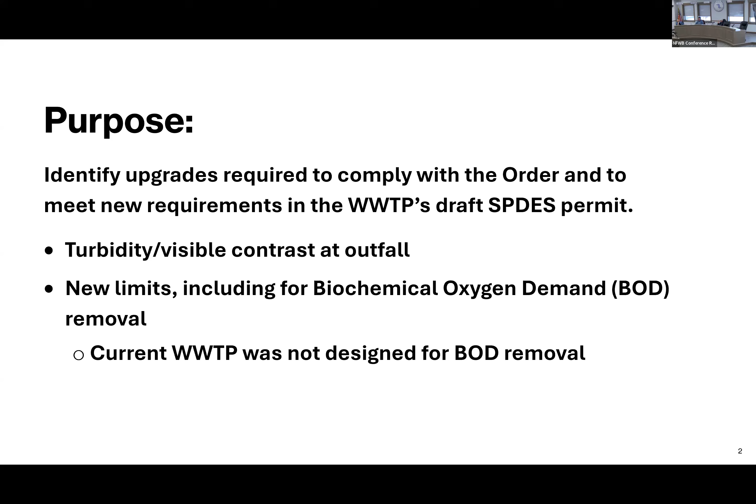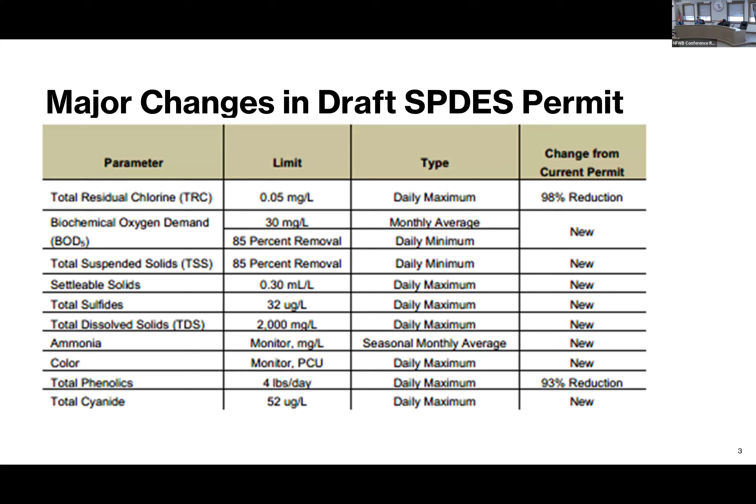In addition, the main focus of the order is on turbidity and visible contrast at our outfall in the lower Niagara River. So in addition to the BOD parameter that I mentioned, there are a number of new parameters in the draft SPDES permit or tighter limits for certain existing parameters. And the goal was to design a plant that could reliably meet the draft permit requirements, as well as future regulatory requirements.

We were looking to minimize capital costs, in part by reusing our existing wastewater treatment facility, to which all of the sewers in the city are already routed. Reusing the facility eliminates substantial costs. We hoped to find a plan that would limit the increase in operation and maintenance costs associated with the new equipment or processes. And we are looking to deliver upgrades that are flexible and not too difficult to operate.

So in order to get to the point where we have a preliminary engineering report, the board authorized retention of Hazen and Sawyer. The work included a review of existing studies. There's been a number of relevant studies performed over the years, bits and pieces of which were relevant to the preliminary engineering report. The most recent and probably the most relevant is the 2019 Biological Treatability Study by AECOM, which reflected studies and plant scale testing done in 2018 to 2019. Among the technologies tested at that time was the moving bed biofilm reactor, or MBBR, that'll be discussed in a little more detail in a moment.

Hazen and Sawyer also reviewed the plant processes and performance data, especially data developed since 2018. Since 2018, the plant has operated in a remarkably good fashion for its age and the condition of the equipment. We've had some consultants who've helped us really optimize how effectively and efficiently the plant operates, and that has greatly increased our compliance with our existing wastewater permit.

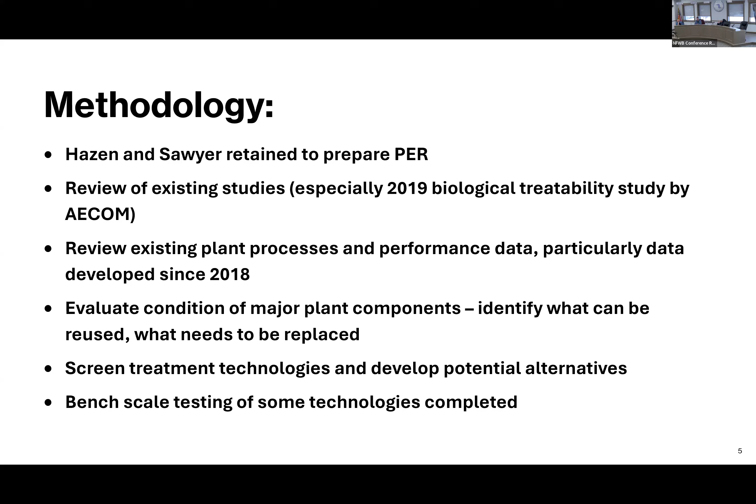Part of the work included evaluating major plant components to identify what can be reused in a new treatment process, but also importantly, what needs to be replaced in order to have a wastewater treatment plant that doesn't need major capital investment for a reasonable period of time after these improvements are constructed. The work included screening various treatment technologies and developing potential alternatives, and some bench scale testing of technologies was completed in order to confirm that some were useful and that definitively ruled out other technologies such as UV for disinfection, based on the characteristics of our wastewater.

So in evaluating the various alternatives, we weighted certain criteria in order to come up with a recommendation. So those included economic factors, capital and operations and maintenance costs. So capital being the initial cost of construction, operation and maintenance, the ongoing year-to-year costs. Operability, so the number of instruments and the number of basins were sort of a proxy for that, how complicated the plant is. Technical, so flexibility for the future.

As we'll discuss with the MBBR, there's a lot of flexibility because you can increase the density of the media in the tanks in order to treat a greater volume of wastewater. And then siting. So although it seems like we have a sprawling campus at the wastewater treatment plant, it's actually not all that large for certain types of treatment technologies. There are certain technologies that would have large, almost lagoon-like structures. So we don't have an unlimited amount of space.

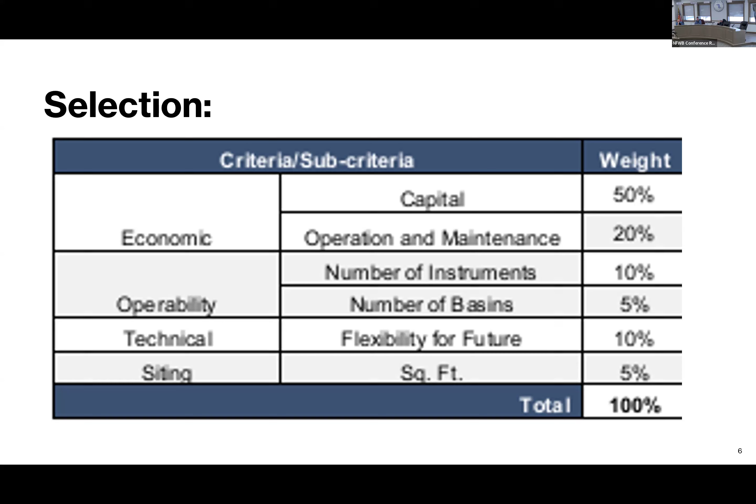And the space that we do have, there is the gorge force main, which is a 30-inch pressurized main going into the plant, and other utilities. So it was important to find a way to site this on the existing property and to do so comfortably. So the total of all those had a weight of 100%. And I will just note for the board that all of this information that I'm reviewing is from the preliminary engineering report. I've just sort of distilled it down into a brief presentation for the board and for the public in attendance. So ultimately, the recommendation is moving bed biofilm reactor, or MBBR, with disc filters following.

So MBBR are aerated tanks that are filled with a plastic type media. The media has a lot of surface area and it's covered in a naturally growing biofilm. So of course, we're going to seed that biofilm. We're going to get bugs or bacteria from other wastewater treatment plants in order to promote that growth. But ultimately, it persists on its own. It's a naturally growing biofilm that consumes or converts pollutants. And then in that process, while a lot of what is consumed or converted does not have to be disposed of, there is biofilm and suspended solids that slough or sheet off, and those are removed further down the process in the disc filters that would also be built.

Importantly, and not in the slides, we plan to keep the carbon that currently exists as our secondary treatment process at the wastewater treatment plant. The carbon will become a tertiary or polishing step in the treatment process. We will have the moving bed biofilm reactor and disc filters as the secondary treatment, it's called. So primary treatment is settling out the solids. Secondary treatment is actually treating the resulting wastewater, or the primary effluent, as it's called. And then we're going to have a tertiary step in the carbon.

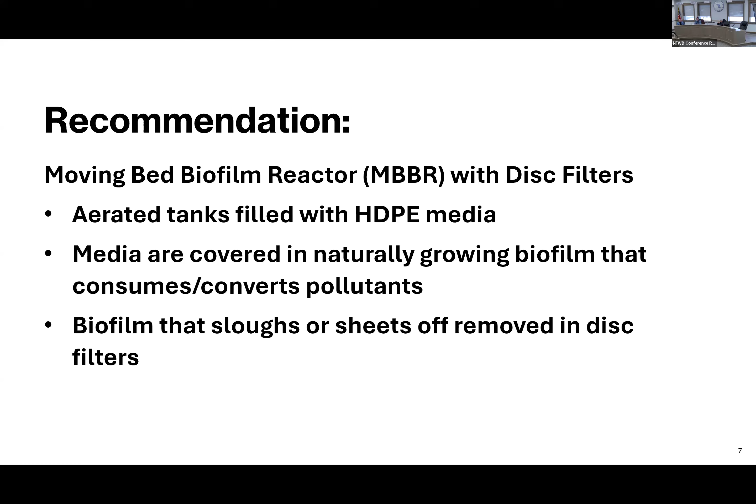So here is a slide that I presented a couple of months ago to the board after our site visits at SUNY Morrisville and Honeoye Falls. There are examples of the filter media, the center pictures, that HDPE or plastic type media that has a lot of surface area on which the biofilm grows. To the left is an example of the aerated tank that we will have, I believe, 6 of constructed in the front of the wastewater plant, and I'll show a diagram of what that'll look like in the future. And then an example of disc filters. These are smaller than the units that we're likely to have installed, but they are a good example.

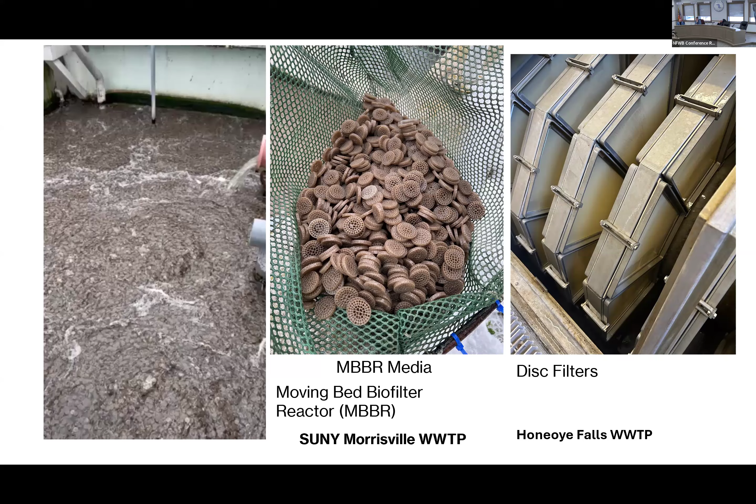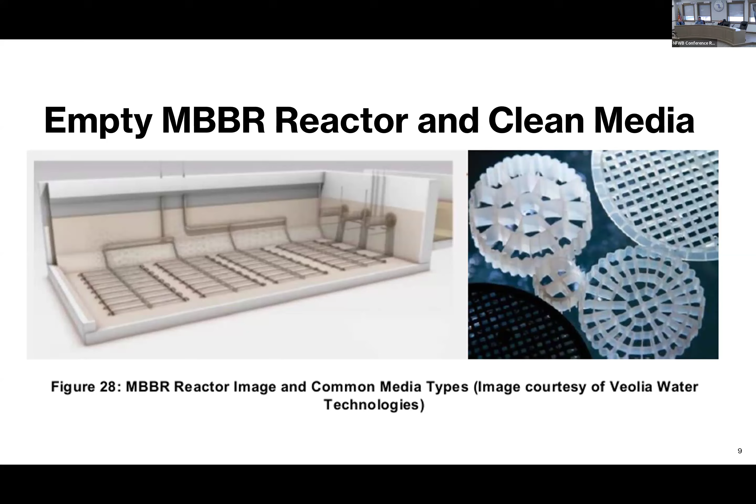So the plan is for the very dilute wastewater that comes through the gorge force main to go directly into the MBBR reactors. There are not substantial solids in that wastewater, so it does not need to go to the primary clarifiers to settle out solids. There's nothing to settle out. So that'll go directly into the MBBR reactors.

The rest of the influent will still go into the primary clarifiers, and then the primary effluent will go to those MBBR reactors. After traveling through the reactors, and so that shows 4 independent trains of 2 reactors each, and there's also room for pumps and things like that that are going to be required, it'll go into that disc filter building that is shown there.

We had examined whether placing those disc filters in sedimentation basin 1, so the long basin to the left, might be practicable. And the conclusion is that a new building, while it does increase construction costs somewhat, is definitely preferable because it'll allow better access to the equipment. It's more predictable. There's a lot of unknowns in trying to reuse the 1970s sedimentation basins.

And plus, having additional basins allows us better wet weather operating. So we can attenuate really high flows that would be too high to push through the secondary and tertiary treatment. As we do now, we use a couple of basins for that purpose. We fill them up, and it can shave off some flow before we start having a concern about overflowing.

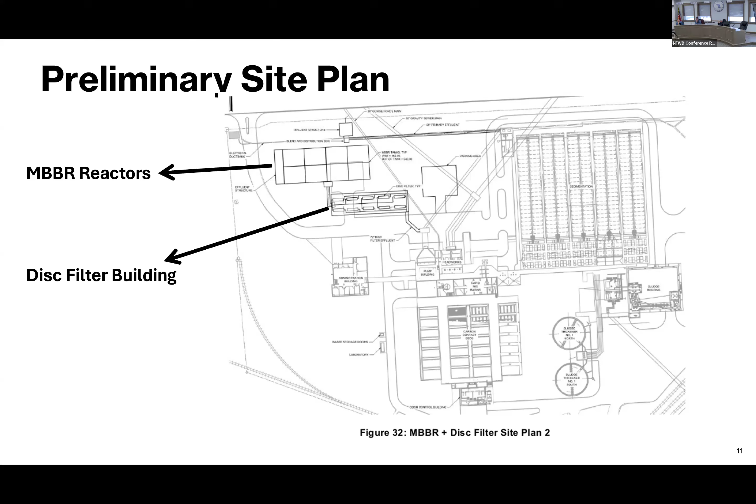So estimated cost, of course, the biggest issue here is the cost of these improvements. We are still working on refining some estimates that are being updated based on a workshop held last week at which Board Member Cole was in attendance for the full 6 hours.

The current estimate in the draft that the board reviewed, escalated based on a June 2029 construction start, is $258 million. Really, the changes that are underway are not going to substantially, materially change that number. So we are looking at a very large, very costly project that in the final PER will be broken down into its various cost components.

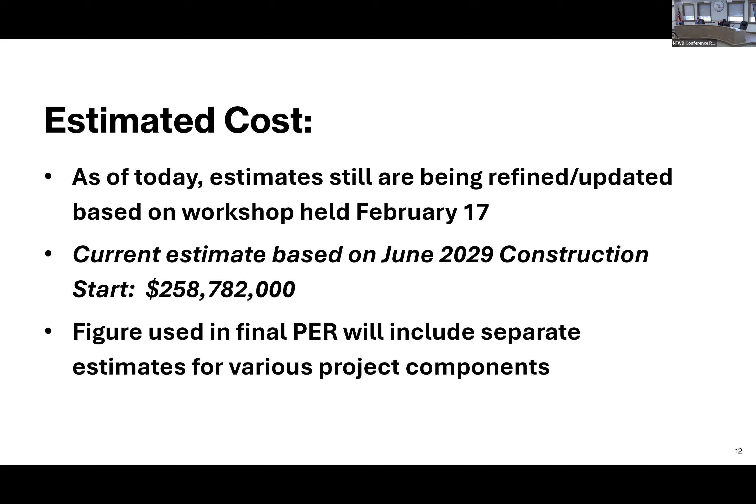So next steps. The immediate deadline is submission of the preliminary engineering report by the deadline of February 28th. We intend to do so on Friday the 27th rather than wait till the very last moment. And then we have to wait for DEC comments or approval, which could take months; it's really not a clear time frame. It's going to take as long as it takes them to review, and I expect we'll likely have meetings with DEC to discuss elements of the report.

Once DEC does issue its approval, we have 6 months to issue a request for proposals for engineering design services. So that'll be selection of another, well, I'm sure Hazen will be a potential proposer, but it may be a different engineering firm. We'll do an RFP for the full design work and the construction administration and supervision. That'll be a much larger contract based on the size and scope of the design. 18 months is allowed in the order on consent for design, and then 4 years for construction once design is complete.

In the meantime, the board likely will see a proposal, possibly a change order to Hazen and Sawyer's existing contract. The concept that we're still evaluating is whether the plant can be derated. So the plant reduced from its current flow rating of 48 million gallons per day to something closer to the current average flows, which are about 24 million gallons per day. So we wouldn't go right to 24. You don't want to be at your average flow. You want the plant rated for more, but perhaps there's an opportunity to rate the plant something like 35 million gallons per day.

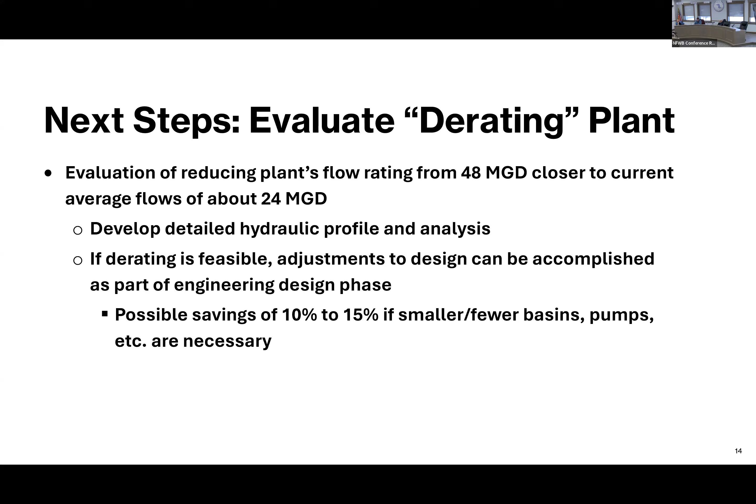Otherwise, once this preliminary engineering report is submitted, we await DEC comments or approval. We're going to, in the coming weeks, update our capital plan and start doing projections of the cost of funding this project with existing grant sources and to demonstrate the impact on ratepayers if this project does not receive substantial funding from the state or federal government. We're going to look at things like affordability benchmarking, which EPA has some guidelines on, affordability for water and wastewater services.

We're going to begin educating stakeholders from industry and others, including elected officials. And now that we have a final preliminary engineering report that we're committed to pursuing with the order on consent, we're going to be in a position to aggressively pursue funding at the state and federal levels with the assistance of the consultant that the board approved, E3 Communications. So that is, in a very abbreviated and quick fashion, a high-level overview of where we stand on the preliminary engineering report and the recommendation. There's a lot more detail certainly in the draft preliminary engineering report, but I'm very happy to answer any questions that immediately come to mind to the extent I'm able to.

You mentioned possibility of lowering to maybe 35 million gallons. If you lowered it, would that affect when we get too much water? Could that hurt that system? That's all a factor that needs to be evaluated. We probably still would want the capacity to treat. Right now, our wet weather operating plan requires us to treat peaking flows up to 85 million gallons. Perhaps Mr. Williamson, Doug, do you recall? Right. Yeah, 85 million gallons.